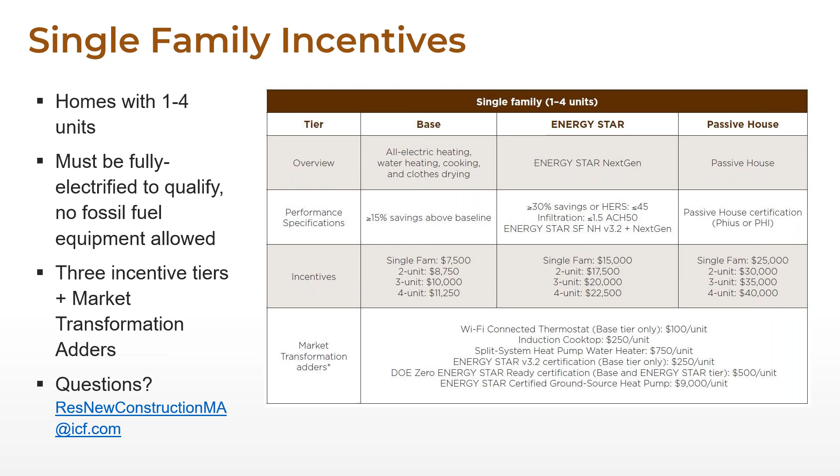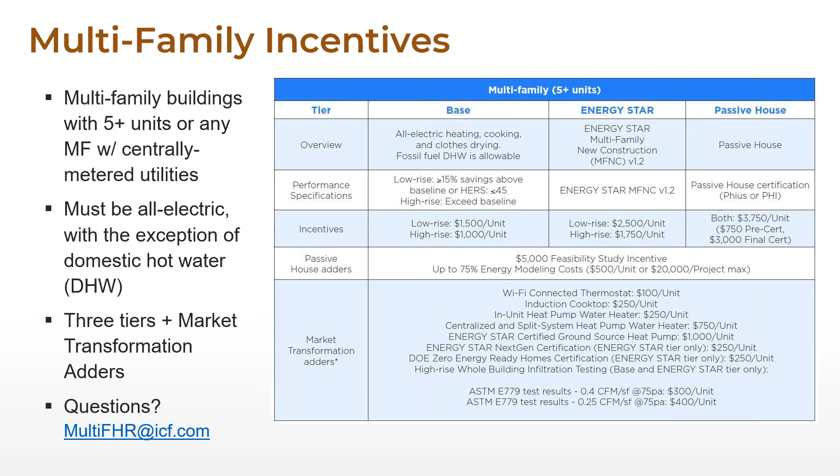Welcome, everybody. Again, my name is Jared Blum. And the presentation that we have today is really focused on high performance glazing technologies.

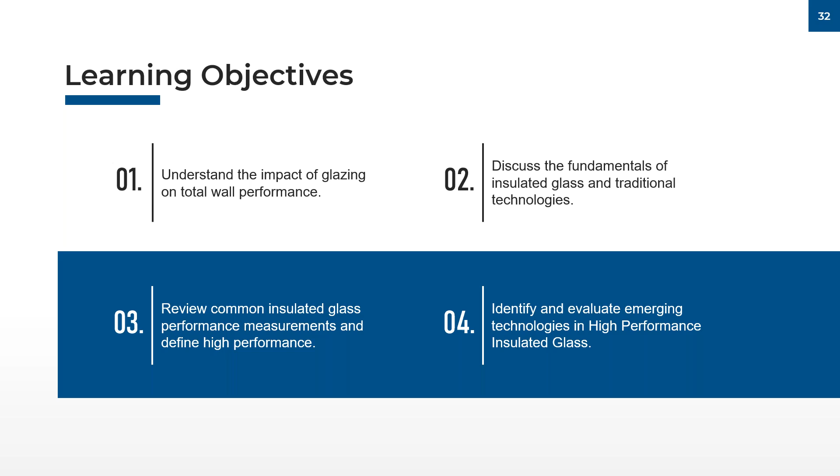Now, there is a noted physicist, American physicist, Amory Lovins. He has written energy policy for many decades. He's also the co-founder of the Rocky Mountain Institute, and he was noted several years ago stating that all of the energy pumped through the Alaska pipeline each year literally goes out of America's windows. That's really a testament to how underperforming today's window stock in our building stock is.

Between still many single pane windows that are employed in a lot of commercial buildings, a lot of our older homes still have single pane windows, and they can be covered up with storm windows sometimes, but this even extends to dual pane windows that still leak out a lot of energy.

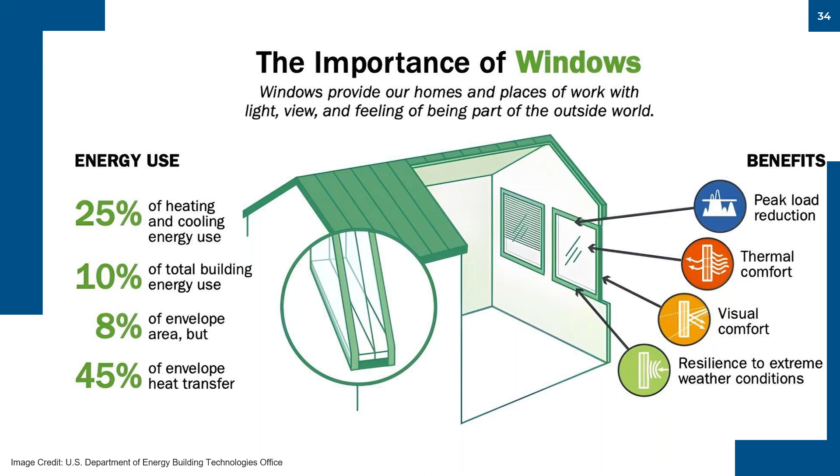And if we look at a standard residential home that might have roughly 8% of the building envelope as glazing or windows, that 8% glazing area of the house contributes to about 45% of the heat transfer through the building. So it's a huge impact that the windows have on the overall performance of a house or a building.

So here's a little pop quiz, just to start off, and I'm giving you the formula right there at the top. If anyone has a calculator close by, feel free to grab it. But here's just one scenario to run by you.

If we were to have a wall insulation of R20, which is pretty common especially in recent years, and an overall glazing area of about 50%, with windows that perform to a U factor of 0.30, what would you guess is the overall effective R value of that entire wall?

I'll give you a couple seconds to think about it. Is it 8.9? Is it 5.7? Or is it 14.4? Well, the answer is the overall performance of that wall would be roughly 5.7.

Now, this calculation is a very rudimentary calculation. It doesn't factor in for thermal bridging or imperfections in the walls, air sealing, anything like that. So it's not meant to be a substitute for much more sophisticated modeling software systems, but it does give us an idea of the overall impact that windows play on our overall wall performance.

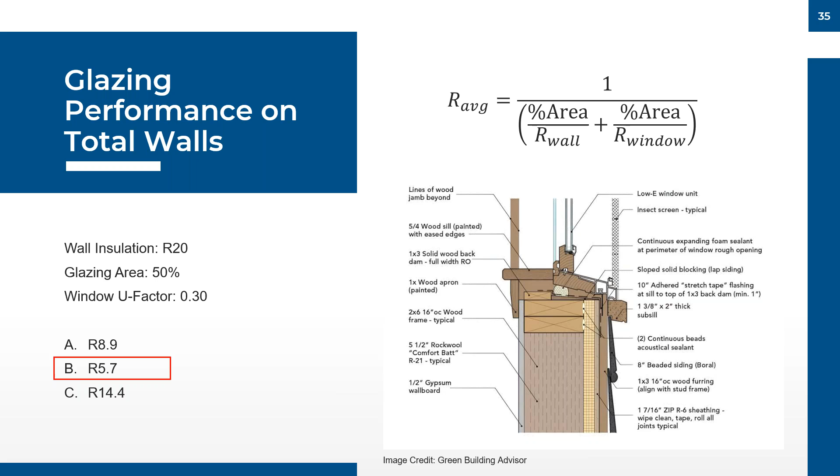But if we wanted to improve that, we have a couple options available to us, and one of which is just increasing insulation on the outside. Increasing insulation from R20 to R40 is not an easy thing. Many times that stud cavity is already filled with insulation, so that means adding extra insulation to the outside of the sheathing of the wall.

And so that brings out a lot of other additional detailing. In addition to more materials, we have added strapping. We have to start thinking about rain screen detailing on these, and integrating that window when we're looking at the windows. It might mean boxing out for structural stability of the windows and added flashing details all throughout that assembly. So this adds more attention to the details for the installation and more materials.

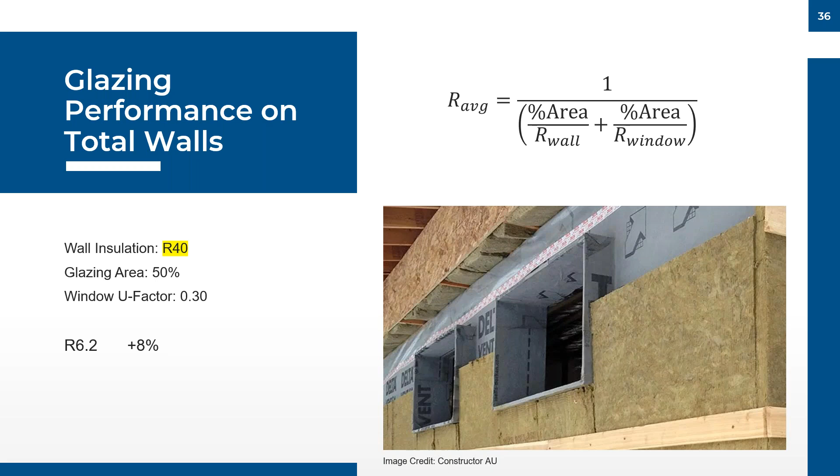If we added that extra insulation and kept everything else the same, with a 50% glazing ratio and the same windows at a U factor of 0.30, our added benefit from the baseline would be an additional 8% gain. So we're going up to an overall value of 6.2 on that.

Another strategy that we might think about doing is improving just the windows. So starting with an R20 insulation within our walls, going back to the baseline and the same glazing area of 50%, but now going from windows that perform to 0.30 down to 0.20. So this is a better performing window, going from roughly an R3 window to an R5 window on this.

And the return is much more substantial. So now we're getting roughly an overall wall performance of about an R8, and in other terms, about a 40% gain from our baseline. So if we simply just improve the windows rather than the added insulation on the outside, we get a much easier, faster benefit from that.

Now, obviously, if we were to combine both of those strategies, we get even better performance in the walls. So now 50% glazing ratio is pretty high.

That's quite a lot, but as architectural trends, especially in residential construction, more modern homes are becoming more popular, and what many homeowners are looking for is more glass and more connection to the outdoor environment.

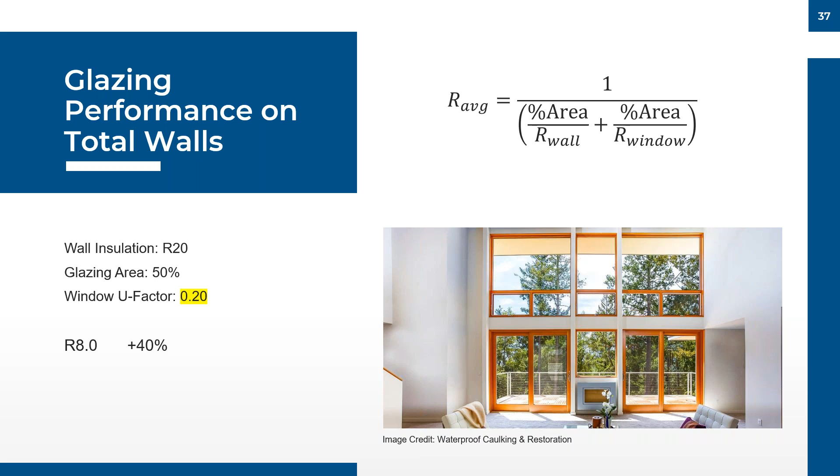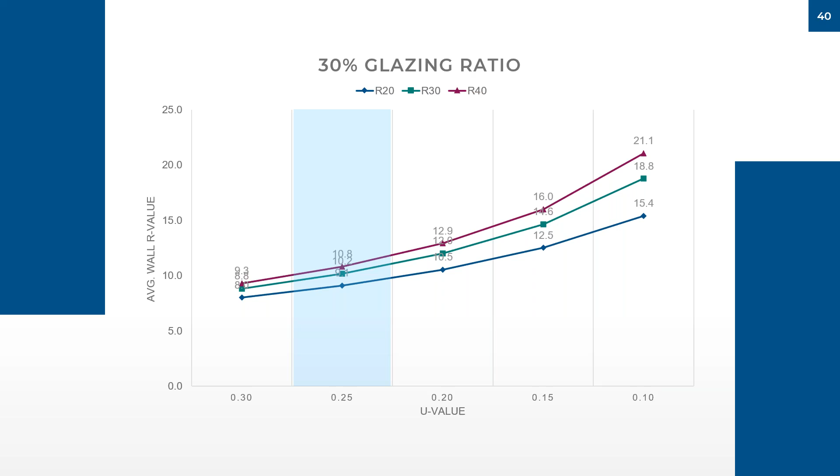So let's take a step back and take a look at how heat transfers very quickly through a window assembly. We'll use this information later on to help identify higher performing glazing systems. The goal here is, how do we keep our glass area on the walls without sacrificing performance?

Heat transfer happens three different ways, and we're really going back to 5th grade science on this. When we're talking about conduction, we're talking about the physical transfer of heat through physical contact of materials, and that can happen at the frame and sash components, even at the edge of the glass, where the glass comes in contact with the spacers, and the extra pane of glass—that's where conduction happens.

When we have a cold winter night, heat rises. So when this pane of glass gets cold, that cold air will drop down and force the warm air to come up within that airspace, and that starts the convective loops within there.

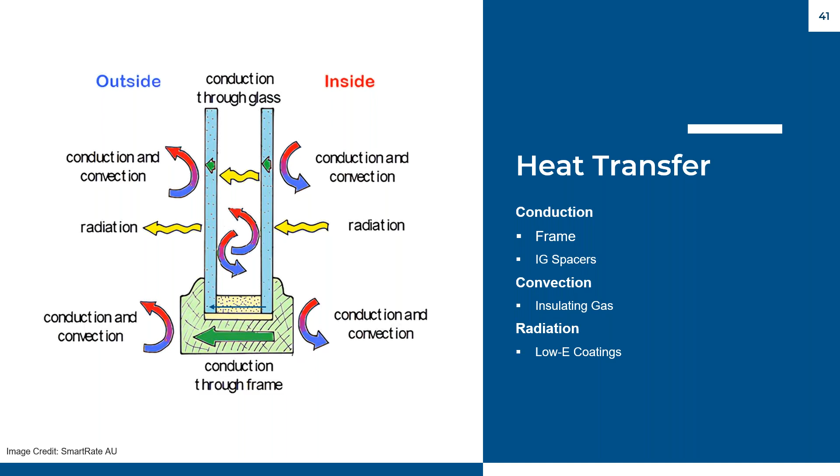And then finally, radiation is really just the radiation moving through the windows themselves, and that's where many window companies will employ low-E coatings to counter that effect. We'll get into each of these a little bit more in the coming slides.

But if you look at the overall performance of different components within windows, it's really broken down into 3 main categories. The first, the center of glass, is the largest component that affects the overall performance of a window—roughly 60 to 80% of the overall performance comes from the glass. That's because it takes up the largest area and happens to be the best performing component. The edge of glass takes up a smaller percentage, roughly 10 to 20%, and there's a wide range of performance values that edge of glass can come from.

And then finally, the frame system itself takes up about 10 to 30% of the overall performance of a window. As we all know, there are many different frame systems ranging from vinyl to fiberglass to wood and aluminum windows out there. All of those different frame systems perform differently.

So this is just a little snapshot on overall frame performance. As we look at this, the largest opportunity to increase the performance of a window is the glass. We'll take a look at some other strategies for these other two areas in the coming slides as well.

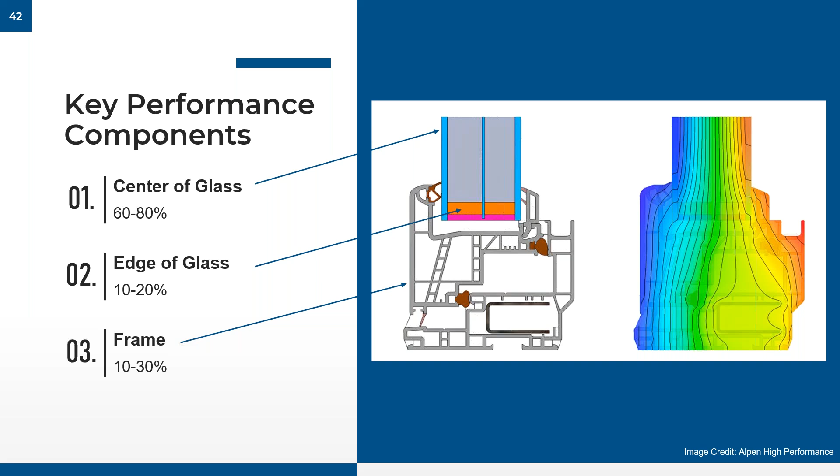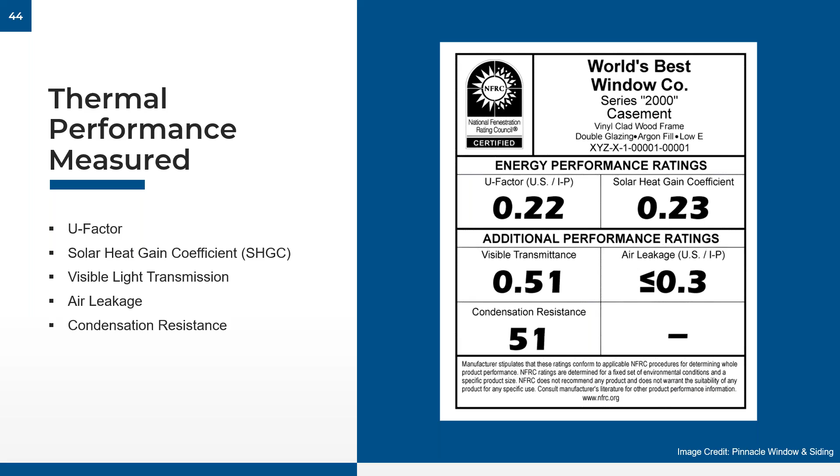Just to refresh a little on how windows are measured, there is a standard published by the National Fenestration Rating Council that requires most windows to be labeled with something like what's shown on your screen right now. This is often referred to as the NFRC sticker, but it has several different areas that windows are measured in. We'll review those briefly here.

The first, and many times the most important indicator of performance, is the U factor. We can see that listed right here in the top left corner.

The U factor is really a measure of how much heat energy is moving from inside to outside, or escaping through the window system, in wintertime conditions. So it's taken at 0 degrees on the outside and 70 degrees on the inside. It's a measure of how much heat escapes through that window system. This doesn't account for air sealing or anything like that—it's just a measure of the total window performance, including the frame, the glass, and the seals themselves.

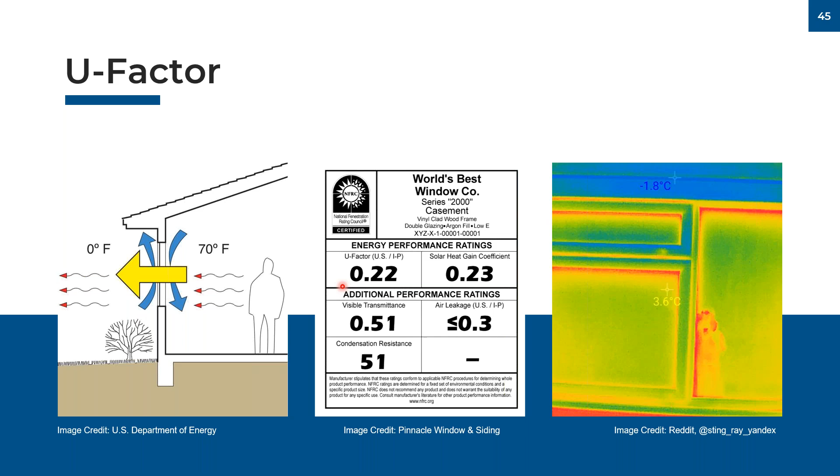Because it's a measure of how much energy is lost, the lower the number, the better performing the window is. It's also the direct inverse of the R value. So if we had a U factor of 0.20, that would equate to an R5 window in total window performance. It's also good to note, when looking at U factors, whether it's the center-of-glass value or the total unit performance being evaluated. The total unit performance gives a better indication of the overall window assembly.

The next measurement is the solar heat gain coefficient, shown right next to the U factor. This is a measure of how much of the sun's radiation, or heat, comes from outside to inside. Unlike the U factor, this is more relevant to different climate zones.

Southern climate zones such as Florida and Texas want to block out as much solar heat gain as they can, whereas as you move into northern climate zones, some buildings or homes can take advantage of passive heating through the windows, especially in passive house construction. So it's not a straight rule that the lower the number, the better—it's really climate specific for the solar heat gain coefficient.

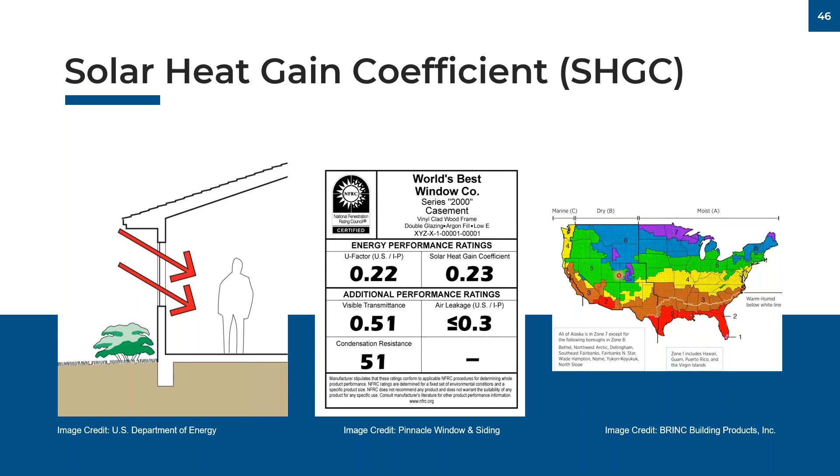Visible light transmission is a measurement of how much light comes through the window assembly, including the frame area. This doesn't always directly impact the energy efficiency of the window, but it can impact the energy efficiency of a home, since allowing more light in reduces the need for extra interior lighting. So it doesn't always have a direct measurement on the window's energy efficiency.

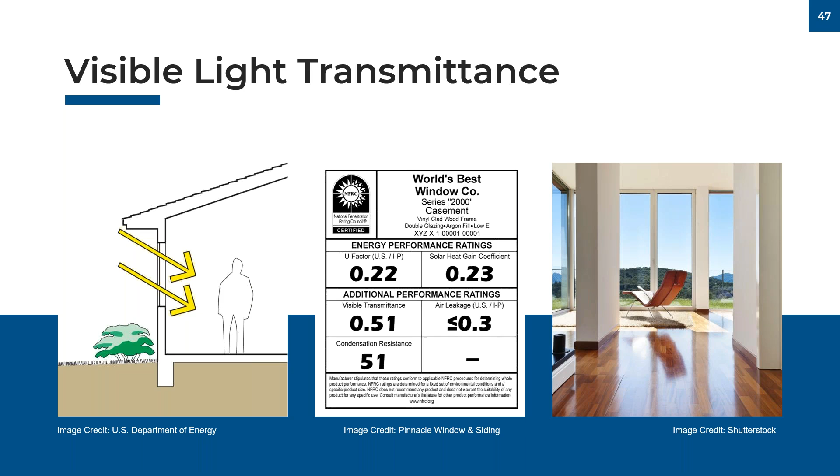Now we're going to skip over air leakage, since today's focus is really on glazing performance—but just know that generally, the lower the air leakage of a window, the better.

Finally, condensation resistance is taken at those same wintertime conditions—0 degrees outside, 70 degrees inside—and we start to think about the humidity levels at play: high humidity on the inside, low humidity on the outside. The higher the number for condensation resistance, the better performing that window is. When we talk about condensation here, we're really talking about room-side condensation—what develops on the room side surface of the glass.

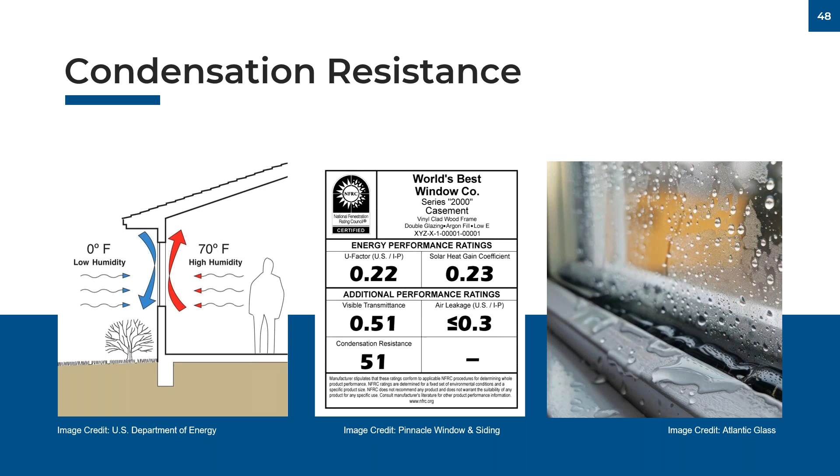This is an indicator of the overall performance of the window—how well it insulates, from the frame systems to the glazing systems and the spacers within those glazing systems. We'll identify several different ways to improve all of these numbers later in this presentation.

If we look at over time here on the left-hand side, we can identify various traditional glazing solutions, starting with single pane glass. This movement really kicked off in the 1970s energy crisis, where the price of oil skyrocketed, which brought about new technologies in windows, first starting with double pane glass and then double pane low E windows.

Triple pane windows have been on the market for some time. These are US adoption rates right here, so we really haven't seen much adoption of triple pane windows. Part of that is the added cost. Another part is they really haven't been needed from a code compliance standpoint until recently, so we'll take a look at that.

But most of the time, most of the windows for code compliance today, we've been able to satisfy code by dual pane insulated glass that has low E coatings applied to it, argon fill, and various low E coatings. Most recently, we've seen low E coatings applied to surface 4.

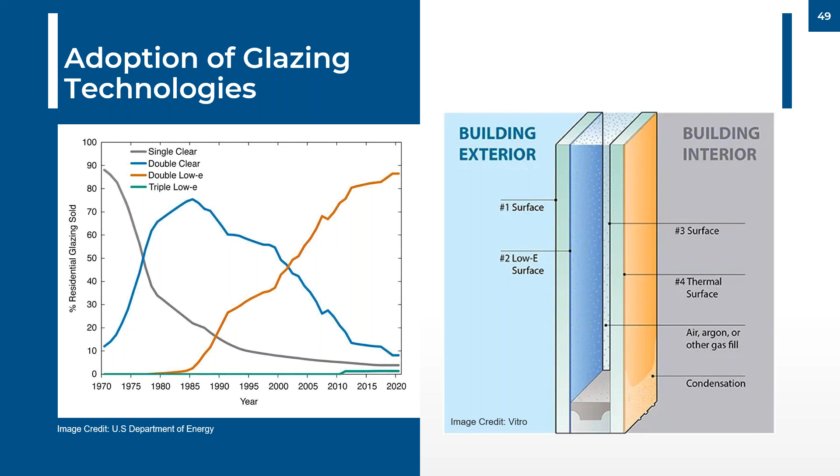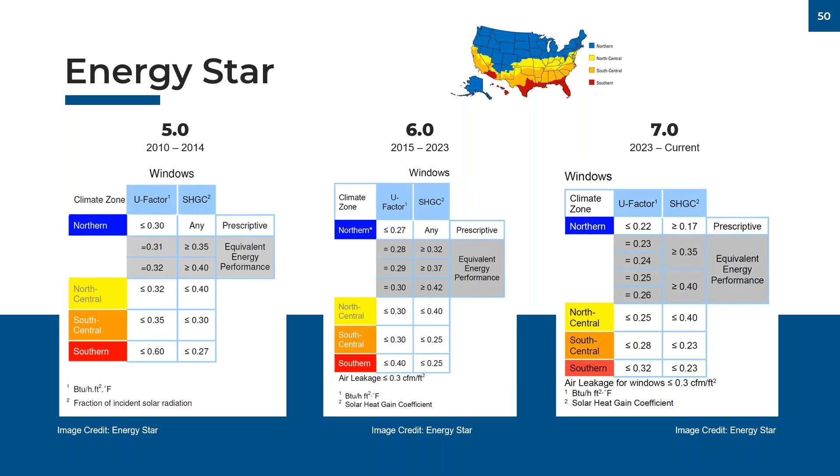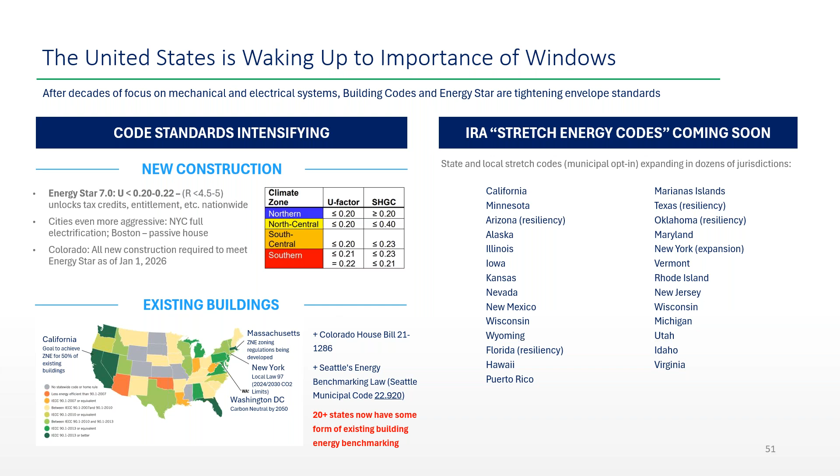Along with that, we see more code adoption. First, obviously in Massachusetts, we have the stretch codes and now the specialized stretch codes. I mentioned earlier that Massachusetts led the way in the country, and now we see over 26 states and territories who have also either adopted their own version of stretch codes or are actively using the Massachusetts model as their next version. So we're seeing rapid adoption nationwide for these stretch codes.

Even if we look to our neighbors to the north in Canada, they have aspirational goals for residential windows starting next year, just a couple months away, that all residential windows will need to perform to a U factor of 0.21. That's an advancement from where they are now. And in just 5 short years, that makes a big jump all the way up to 0.14 for the windows.

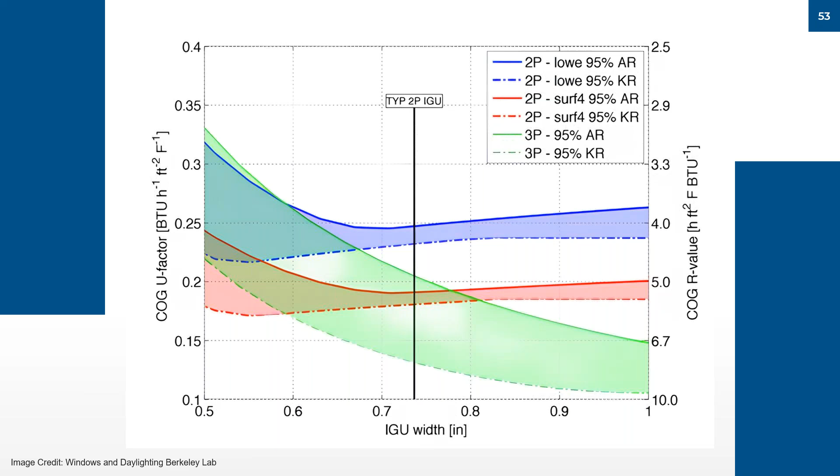And the overall range that glass can achieve with dual pane low-E coatings, with either argon or krypton, that's the surface 4 range you can achieve with that additional low-E coating on the inside. You can see the bump you get with that 4th surface low-E coating. And then the range you can achieve with triple pane. You can see this is really the direction we need to move towards, higher performing systems beyond what dual pane can achieve.

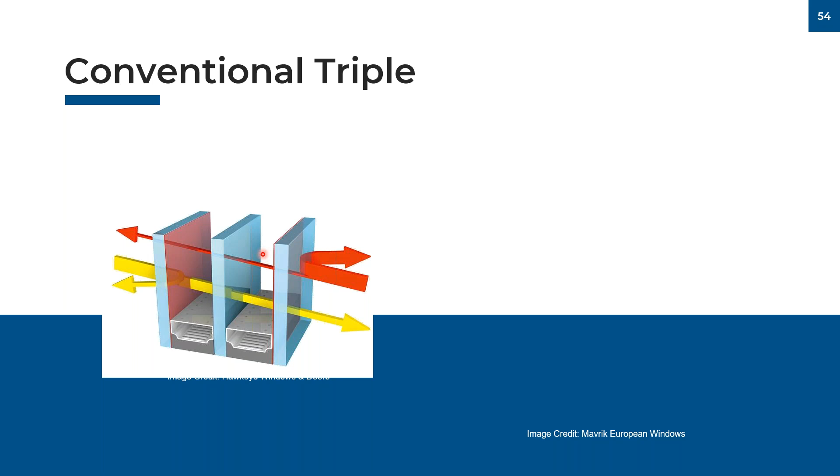So that leads us to conventional triple pane glass. It looks something like this. If you look at just the glass itself, never mind the frame system, they look like this. We take typical dual pane glass and add another sheet, another spacer, and an extra 3rd pane of glass. That gives us an extra layer, or surface, for an extra layer of low-E coating. And because we have an extra air chamber, it really cuts down on those convective loops we were talking about. So this does a phenomenal job.

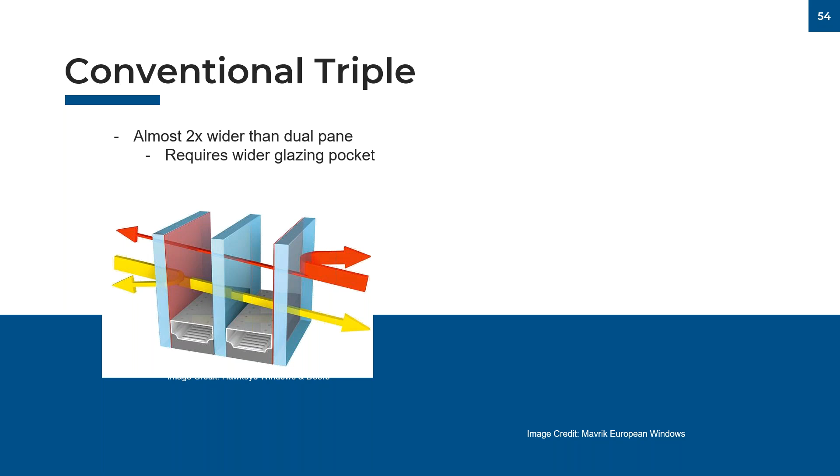There are some drawbacks with conventional triple pane glass though. First off, it's almost twice as wide compared to a dual pane glass unit, which requires a glazing pocket from the frame system that's almost twice as wide, or can accommodate that extra dimension. It's also, because it's triple pane, we have an extra sheet of glass, and because of that, it's heavier than dual pane.

So all of that adds up to added cost, when we start adding in more robust frames that can handle the extra weight. And this is a big reason why triple pane windows are many times more expensive than dual pane windows. It's not just because it's an extra sheet of glass - the extra sheet of glass doesn't add much to the overall cost of the assembly. It's the added weight and the extra glazing pocket required to get to that added performance.

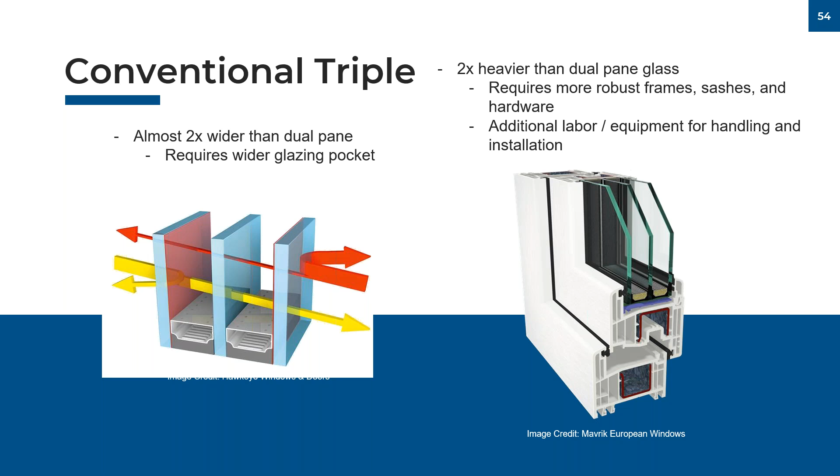So we have a need in the market for lightweight, high-performing windows that are relatively thin, that can accommodate those thinner glazing pockets. So now, how do we improve upon some of these systems? We can always look at the low-hanging fruit: the gas fill, the low-E coatings we already talked about, the IG spacers, the desiccants, the sealants, the glass. Those are all very worthwhile considering.

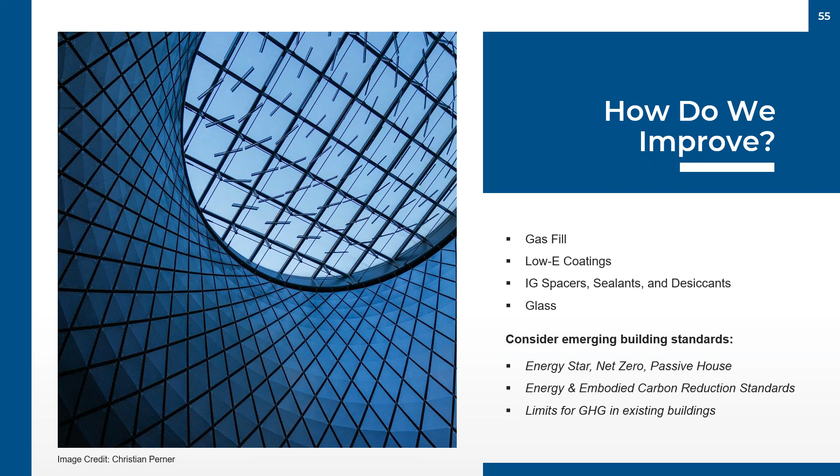But we also have to consider some of the emerging codes when it comes to Energy Star standards. Where are we going, from code compliance to net zero to passive house? What standards are we building to? Along with other emerging carbon reduction standards, limits on greenhouse gases within existing buildings that we're starting to see in New York City.

So taking a look at some of the easier ways to improve glazing systems, we could first take a look at the gas fill. We still see some windows being filled with air, believe it or not, especially when windows are being shipped in different elevations. If they're shipped from low elevation to high elevation, we can't fill or seal those, because sealed air spaces will certainly go through some pressure changes in that elevation change. So we still see some windows being filled with air - you can see the density of that is there.

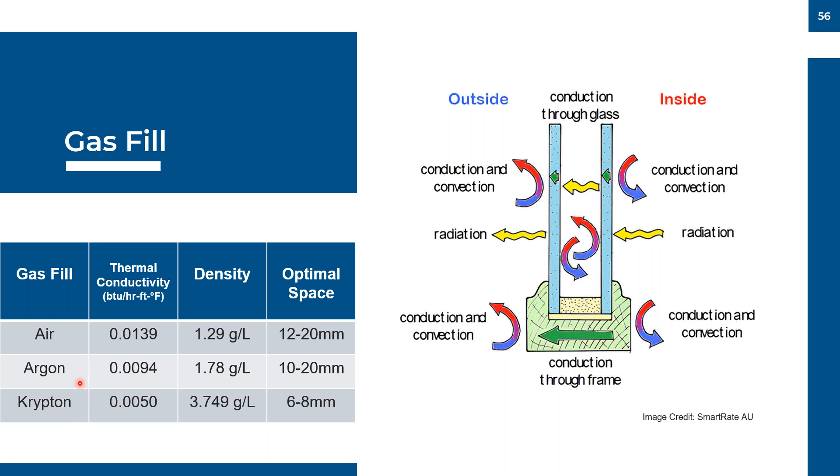Argon is an inert gas that is very common, and that's what most windows are being filled with. There's another inert gas called krypton, which is significantly more insulative than argon. It's not as readily available on the market, and it does cost more, but the cost has recently come down, and so that's one method to really increase the overall performance of the glazing system. It's worth noting that there are optimal spaces, talking about the space it's entered in and filled within, and its effectiveness in those various spaces. So argon is certainly better than air, and krypton is then significantly much better than either of those first two.

Another way to improve the thermal performance of glazing systems is the spacer system within the windows. Most commonly you'll find metal spacer systems within here, and they're tried and true. This is the original spacer that was really put into insulated glass windows, dating all the way back to the 1970s, so it's very, very common.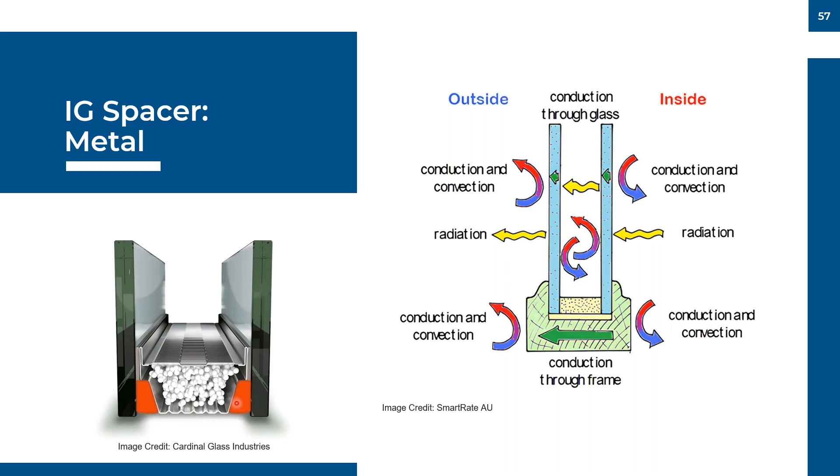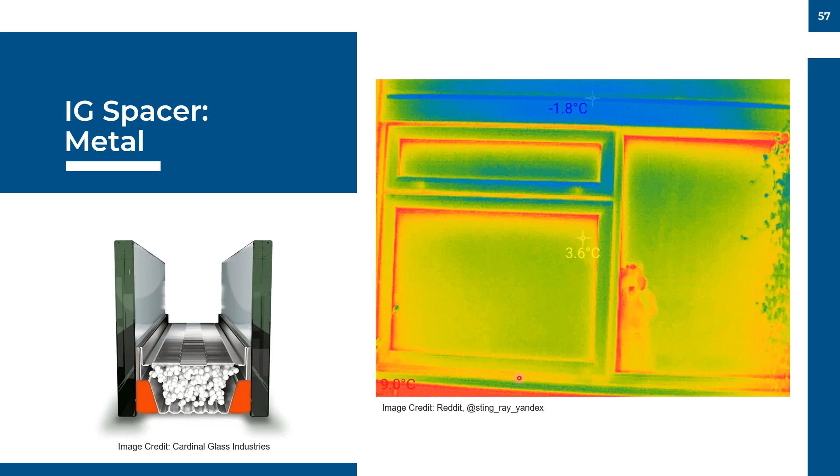Now what happens is that if you have a very high performing insulated glass with argon gas and low E coatings, you can see that the center of glass performs very well, but the edge of glass is still relatively warm. This is viewed from the outside, where a lot of energy is still coming through the edge, and those edges can account for about 10% of the overall area of the window.

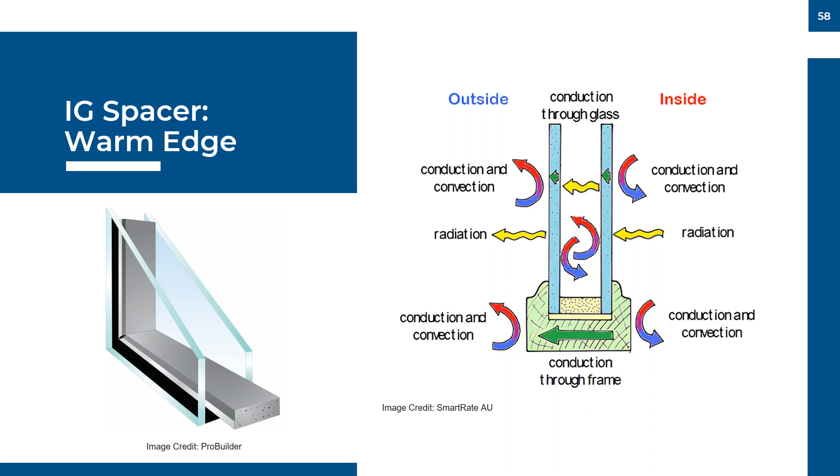So that's one way to improve, is to take a look at the spacers. One alternate spacer system is called the warm edge spacer, and these can be built of many different non-metal materials, ranging from different types of polymers or plastics, all the way to foam spacers, that don't conduct heat as well as those metal spacer counterparts would.

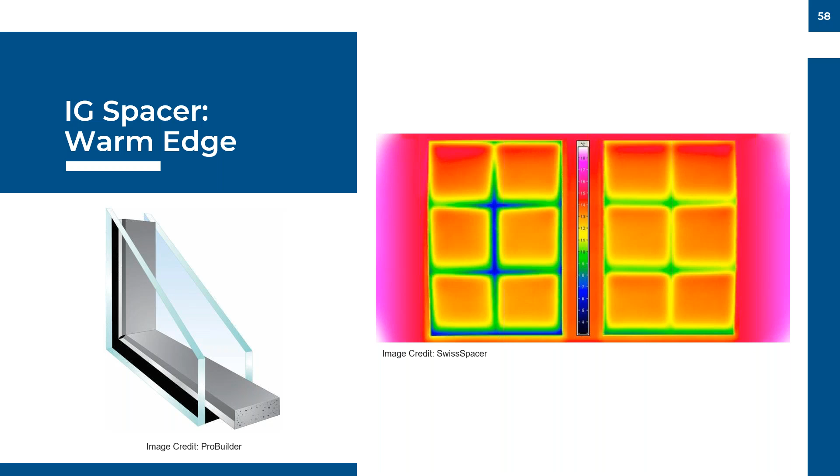You can see a side-by-side comparison showing metal spacers on the left and warm edge spacers on the right-hand side, and how much conductivity happens between those. Of those two systems, they really employ the same basic components: a solid spacer with a primary seal and a secondary seal.

Now, many times the problems with windows that we see all over the place with insulated glass windows is they fog up, and that's an indication that the seals have gone past their useful life.

What happens with these spacer systems is through the heat and cold fluctuations of the year, that sealed airspace can experience several different pressures. In the wintertime, the primary seal can experience a pinching effect, and during the summertime, you can see a pulling effect at those seals.

Over 20 or 30 years, you'll see that eventually go and release that seal, and that's when we see the fogging. It's at that time that owners will start to consider maybe we need new windows, because the seals have gone, and they start thinking about replacing the windows. So what if we had a longer lasting seal?

That's what you'd find with a thermoplastic spacer, or TPS, as it's sometimes known in the industry. It takes a different approach. Rather than this multi-point system, it injects more of a structural sealant within as the primary seal, and backs it up with a secondary sealant behind there.

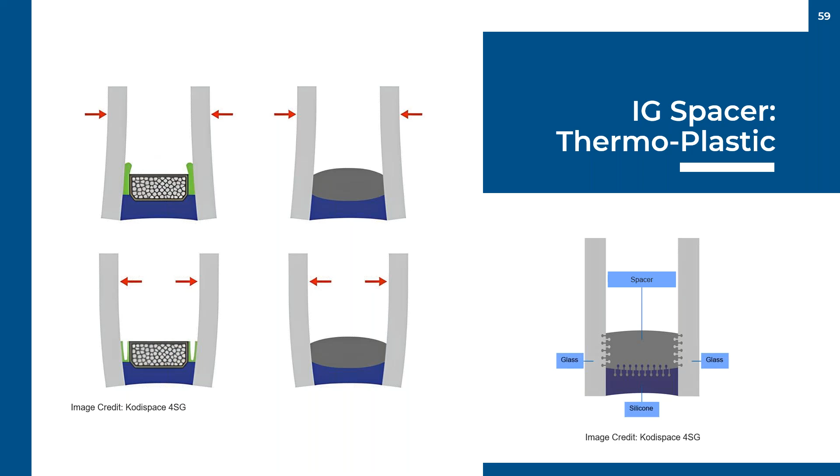Now, if we want to look at more advanced systems, more emerging high-performance glazing systems, there are new technologies coming on the market that we'll cover in the next few slides that give you a low, lightweight solution and overall thin dimension that can be used in many different window systems on the market.

The first of which is thin glass. This is the same type of glass that you see on your flat screen TVs, on a lot of your computer monitors, or even your cell phones. This is not a new technology. It's actually a concept that was developed by the Berkeley National Laboratories back in the late 80s, before thin glass even existed.

What it really does is take a very thin sheet of glass and insert it within a standard dual pane insulated glass unit, creating a thin triple. This thin glass can range from 2 millimeters thick all the way down to 0.5 millimeter thick. So now we have the opportunity to add additional layers of low E coatings on these, and this can be produced as a thin triple, or what you see in the center of your screen, or even a thin quad window.

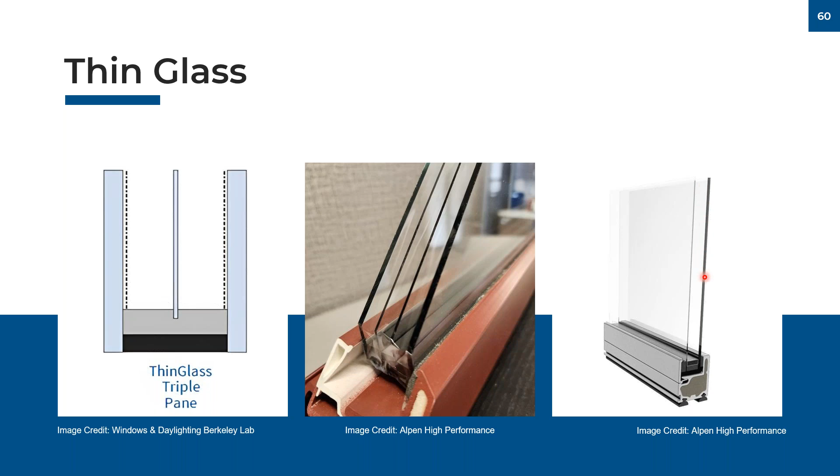You can see that this can be used as glass within high performance windows. It can also be used as a secondary window—think of this as an interior storm window, which is another way this is being deployed.

Thin glass is really just very much like regular glass. It can be made a couple different ways, such as regular float glass, commonly referred to as soda lime float glass. There's a different manufacturing process for thin glass, which is vertical fusion drawn, where molten glass is poured into an isopipe and spills out both sides. As they drop down vertically, those two sheets fuse together, and as it drops, it cools at the same time. It's cut, put off to the side, and then manufactured into whatever it needs to be.

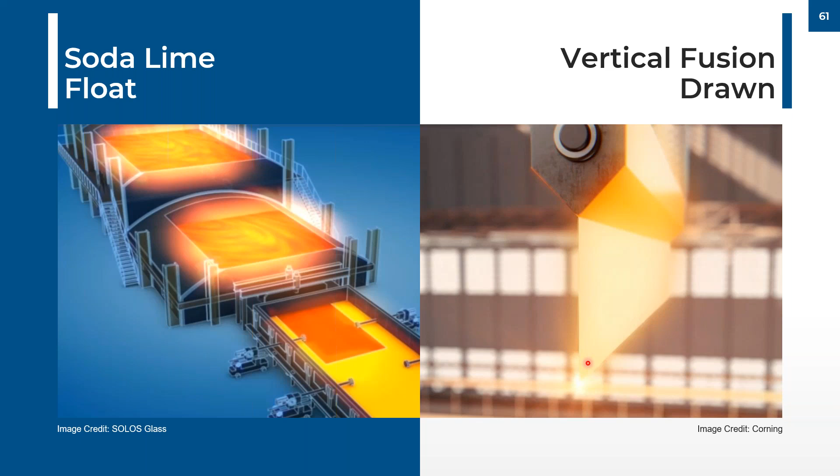This is really how it gets to be so thin, very, very thin. So to recap, thin glass technologies—here's an example of thin glass quads right here. It can be used in several different applications, from replacing existing glass in window systems, to being used in new window systems, and also as a secondary window system.

Your performance range goes all the way from an R7 for a thin triple, and when you look at thin quads, that can get all the way up to an R16 center of glass performance value. The cost of this is going to be more than dual pane. It does perform significantly higher than dual pane, and it has more of a range than traditional thick triple pane glass. But because of flat screen TVs, thin glass has been on the market for many, many years, so the scale-up period has already happened today.

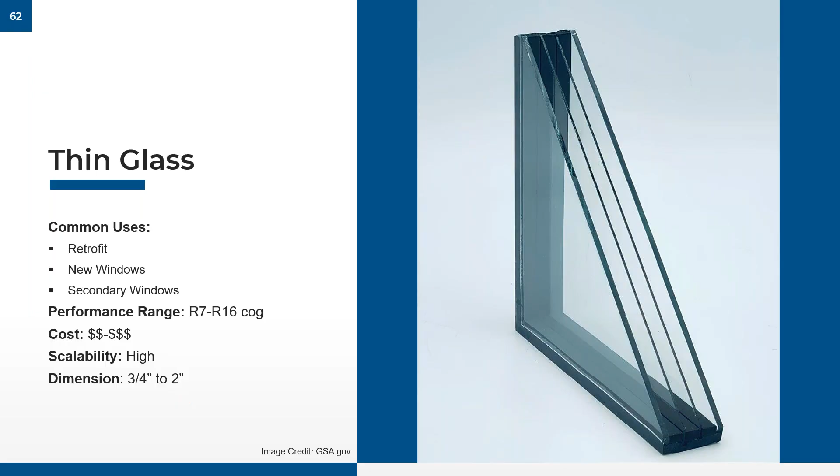We can see overall dimensions—we're talking about the IGU right here. Dimensions range from three-quarters of an inch for a thin triple, all the way up to 2 inches for the wider thin quads. So a big range for what those can be.

Now, vacuum insulated glass is a relatively newer option as well. Just like thin glass, vacuum insulated glass has been a concept that's been around for over 50 years. This is really using one of the best insulators on the market, which is a vacuum, because heat cannot travel through a vacuum. So the challenge has always been, how do we get this to seal? Because now we can't use traditional edge seals like we saw in conventional dual or triple, or even the thin triples and quads. This seal is under extreme stress because of the vacuum insulated properties.

They also employ a spacer throughout, or these pillars throughout the assembly, to keep the two sheets of tempered glass from caving in on each other. You can see the profile of this is very, very thin, starting at just over 8 millimeters thick, front to back. So a very, very thin system here. It's a great solution to replace existing single pane systems on the market.

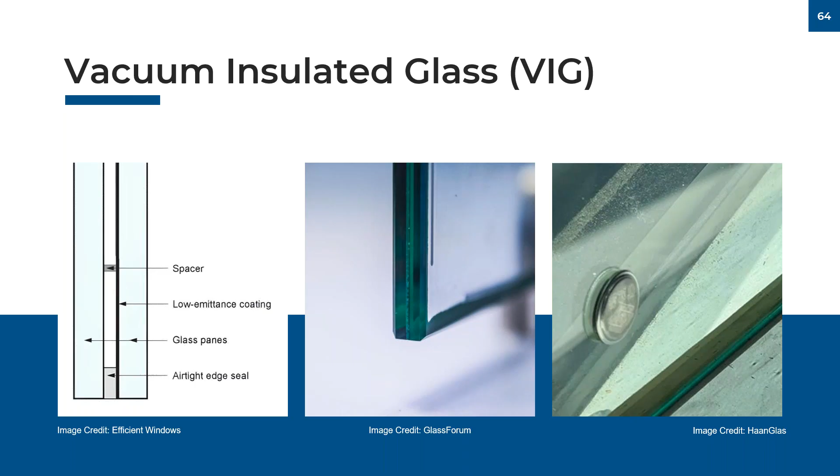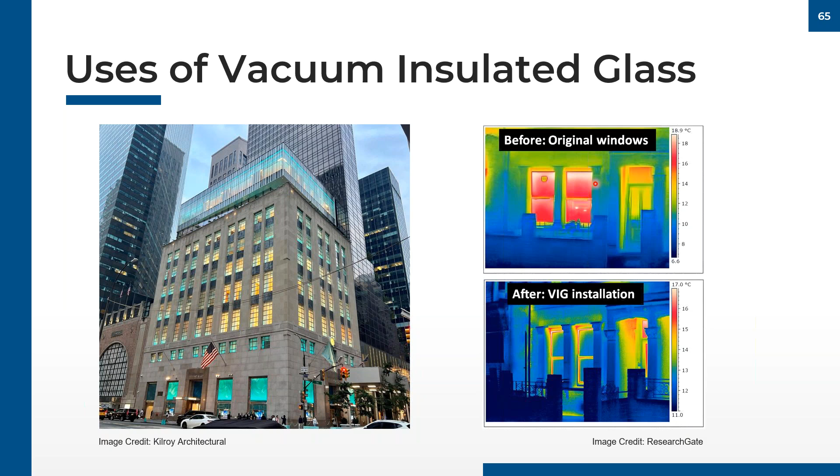Now, the thermographic images you see on the right-hand side—these aren't that building, but you can kind of see what kind of performance you get before, as single pane glass, and after, shown at the bottom. What you'll still notice is the perimeter of these, because they're metal, still doesn't perform as well, even though the rest of the center of glass performs exceptionally well.

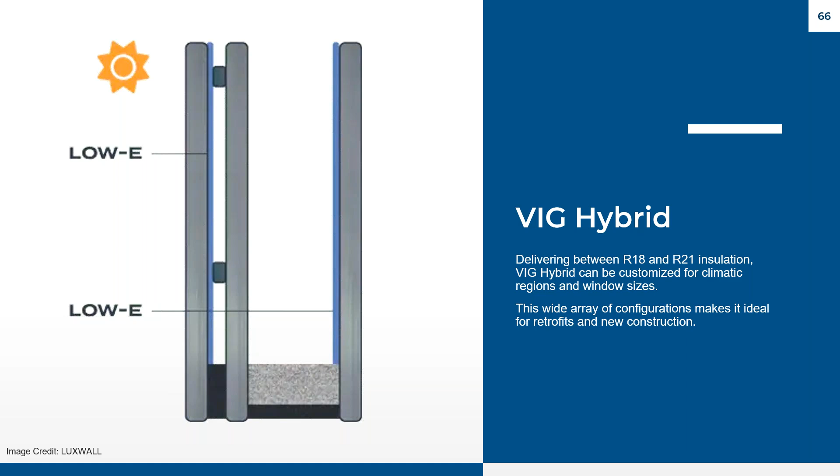In addition, vacuum insulated glass can be employed in a more hybrid scenario. You have your typical vacuum insulated glass on one side, married with an extra sheet of glass to create an extremely high performing glass assembly, ranging from an R18 to roughly an R21. That's extremely high, especially considering many dual pane systems top out about an R4 for comparison.

So in summary, vacuum insulated glass can be used in many different applications, from retrofit to new windows and also secondary windows. We've seen this used in historic applications as the interior layer to add performance to that historic window.

Performance range is very similar. Actually, we can top out a little bit higher than what we saw with thin glass, and the starting baseline is about the same. Overall cost is going to be higher than that thin glass we saw earlier, and these are rapidly scaling up, but we still see them going through that scale-up period today.

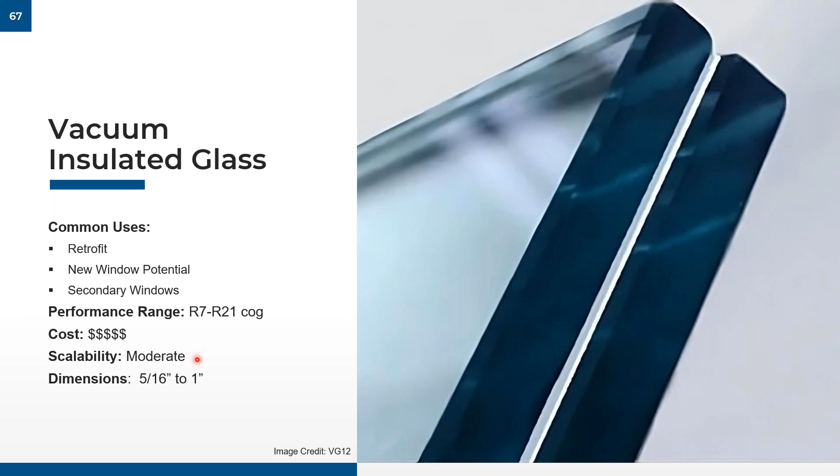Finally, aerogels are another option we're seeing, able to get to that lightweight, high-performing goal we have. There's a company based in Waltham, Massachusetts using aerogels. Aerogels are the lightest weight solid material on Earth, and it's widely used throughout NASA because of its very high insulating properties.

Now, one downside historically has been that aerogels have always had this translucent, semi-translucent appearance, sometimes with a bluish hue, but researchers have found ways to make it significantly more transparent, and now are marrying that aerogel to a sheet of glass.

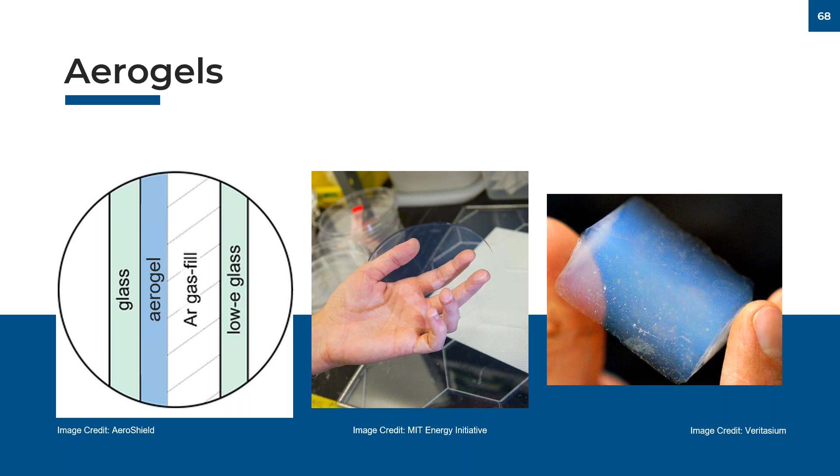This is really intended to fit within the same IGU pocket as a conventional dual pane glass, while keeping the overall weight low, and it can be glazed with argon or krypton gas fills, and low E coatings in addition to that.

So this is a great substitute for dual pane insulated glass, just by adding that silica aerogel to the glass, reaching ultra efficiency. One factor is that the efficiency really depends on the thickness of this material. The thinner the material, the lower performing, and vice versa—the thicker that material gets, the higher performing it can be.

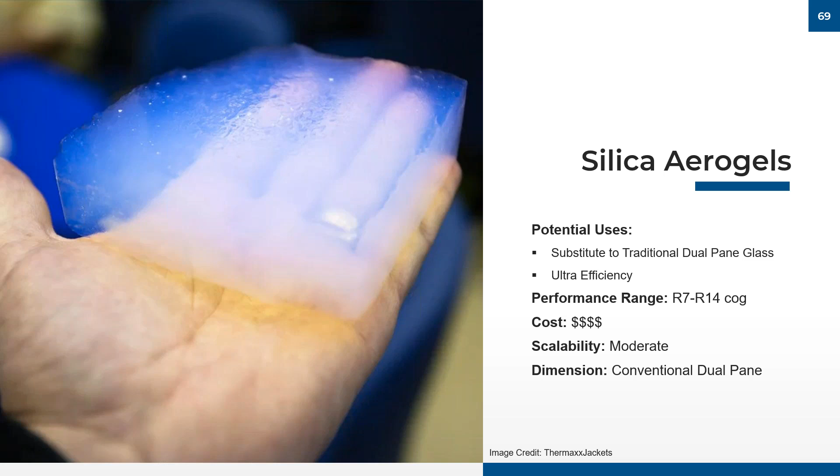This is still in its infancy. We see this ramping up in scale in the next couple of years. I think we'll even see mass production starting next year as well.

So to recap, in comparison, there are several different factors. Really what we're looking for are solutions available today to meet many of the energy code standards coming online as we reach towards electrification and affordability. Here's a small snapshot of where conventional triple pane glass stands from a cost standpoint and overall center of glass performance values, just about ranging between R5, a little bit lower than R10.

Your thin triples have a little bit higher range than conventional triples. That's due in large part to the seals and the gas fills being used with thin triples. And then your thin quads have a higher range, with a slightly higher price point along with that too.

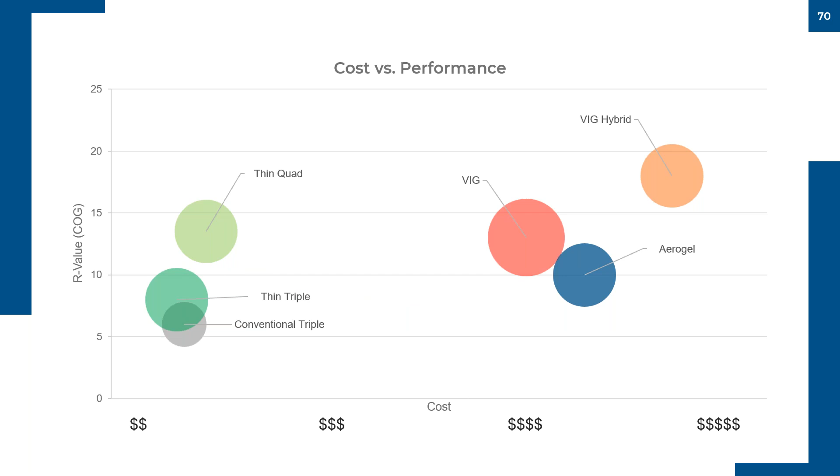Now, your more advanced systems, such as vacuum insulated glass alone, are at a slightly higher, different price range, and when it's married with a hybrid system, even higher performance range, but also higher price along with that. Aerogels, we see at a higher price and similar performance, just above the thin triples. So it's not always about cost.

There are many other considerations: optimal performance for your project, the overall durability of the systems, the technical ability that manufacturers have of producing those systems, availability, acquisition cost, installation costs, and many other risks you may want to consider when thinking about some of these systems.

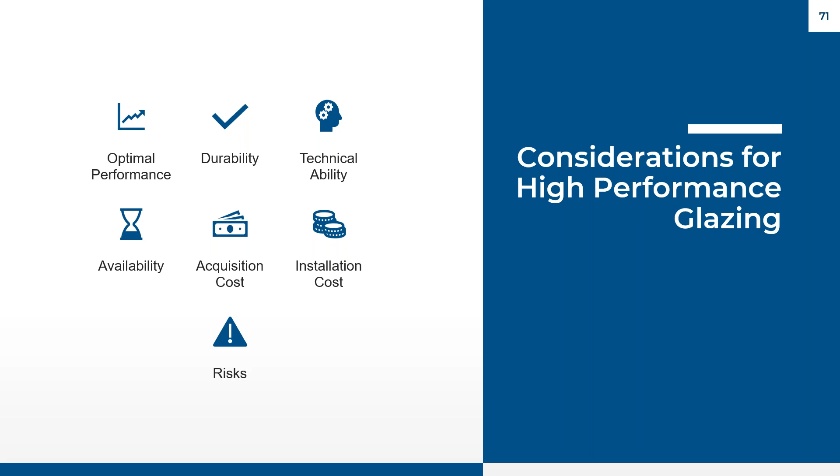And that covers most of our learning objectives today. We talked about many of the insulated glass performance measurements and defined what is high performance. We discussed how we measure high performance, and understand the glazing-to-wall ratio and the overall impact that windows have on the overall performance of the window or of a wall system. And then finally, we evaluated some of those emerging high performance technologies coming to market today and within the next couple of years.